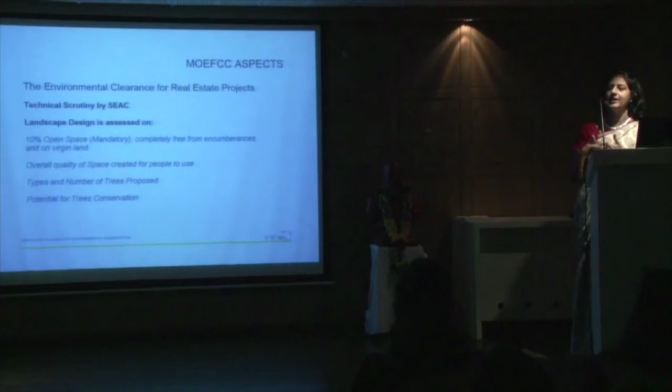As you know, most of these environmental clearance projects in the country happen on a one-on-one hearing. There is a technical scrutiny committee which sits, you present your project in front of them through an accredited consultant like myself, and based on what the technical scrutiny asks you to do, you have to revise your project and go back to them after a deliberative process of about 3 to 4 months minimum. You finally end up getting the clearance.

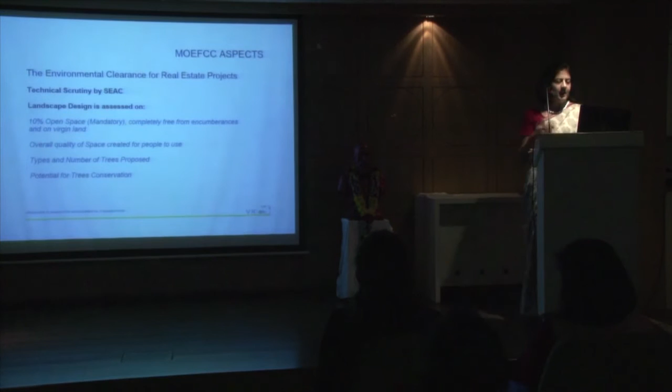They also look a little bit at the number of trees and the types of trees being proposed. So yes, indigenous trees are definitely looked at by one of the members of the committee, and they try to promote indigenous species while trying to restrict invasive species.

If the site already has existing trees, they definitely try to appeal to the developer to retain those trees. Of course, we have to go out to them with a proper ecological report, and through my company we have been insistent to all developers that we get an ecological report done, especially if it is not a very core urban site.

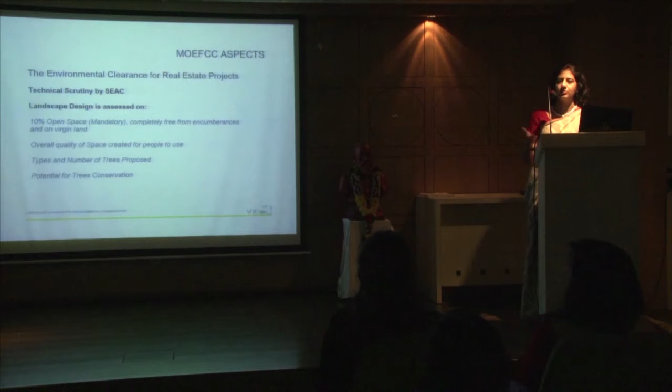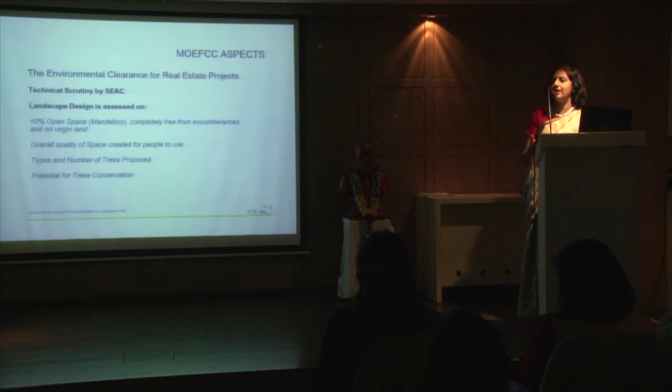If it's a very core urban site, say in Sadashiv Peth, Pune, then having an ecological report done is almost futile because it's almost a brownfield site. But anywhere just outside the city, in semi-urban or rural areas, we ask all developers to undergo an ecological assessment for these projects, which gives us the potential for tree conservation. It gives us an idea as to what actually exists around the site and can possibly guide the landscape.

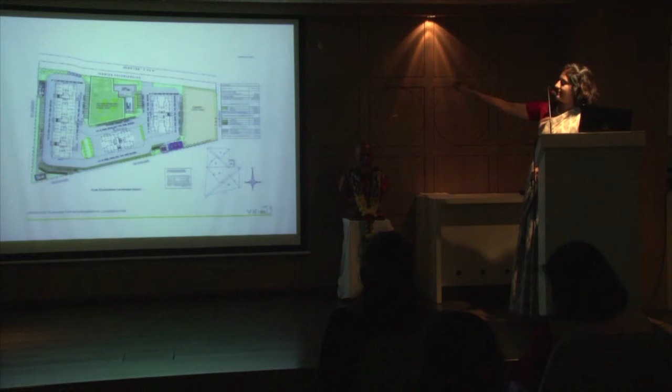So this is how a typical MOEF presentation slide looks like. As you can see, there is a central open space - that mandatory area you'll see with a slightly thicker polygon line. The clubhouse is shown just outside that 10% to show there is no encumbrance on the precious 10%, which unfortunately or fortunately the Supreme Court also has a decree on. So this has to be followed to the T.

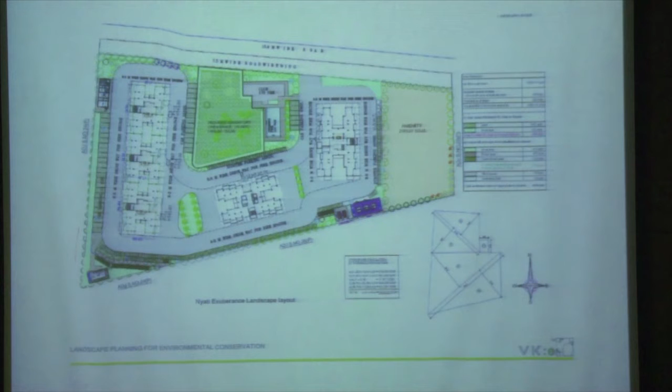Then there is some peripheral landscape which really is small strips of land that just contribute as space for trees, but nothing really in terms of its usage. Again, another site here shows similar landscape areas, and the format for how calculations need to be done is also fixed by this technical scrutiny. So all this needs to be given.

So this is something the committee completely misses out. They are looking at mandatory open spaces, and yes, calculations are all there, but this feature is completely lost. Just before the session, I was speaking about this, about how to bring this sensitivity and subjectivity into the environmental committee of the government.

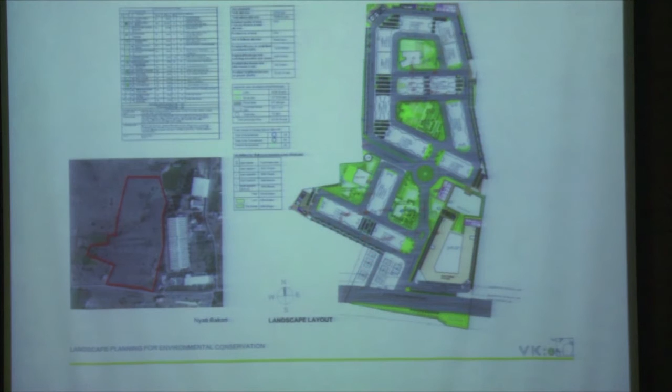That's really the tricky part right now. And like I said, landscape planning is obviously much more than doing landscape design on a 10% open space, right? I mean, all of this audience is going to agree.

As more and more projects are coming outside the city, today I have more than 75 to 80 projects on the fringe of the city where we are going in for environmental clearance. These are along beautiful sites like Manas Lake, or just at the edge of Saswad, where there is a beautiful reserved forest.

For environmental clearance, we are assuming that this site, now under the ownership of the developer, is cut off by a boundary, and whatever comes inside is what I need to think about. Because it's an environmental feature, it goes out, comes in first from somewhere else, and goes out again by the site—unfortunately the larger picture is being completely missed out.

So here are just a few glimpses of how landscape architects can really contribute to this whole process of better environmental scrutiny as well as better environmental planning, even when projects are—for example, I go on a particular site and it's almost heart-wrenching to realize this is going to get completely converted into residential housing blocks. But well, yes, we also need housing, so it is going to happen, but can we not do it in a better way?

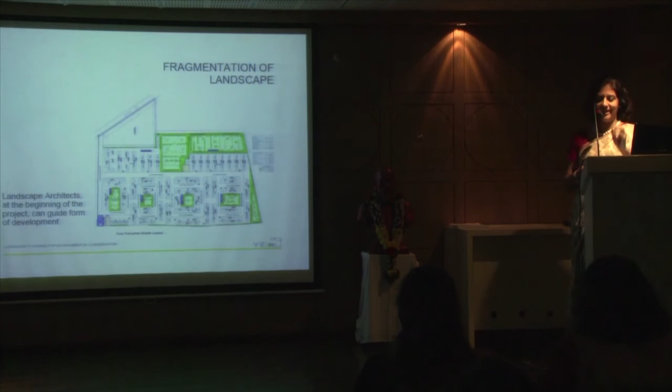I take that privilege of being an accredited consultant, because developers can't go in front of the committee without me. So I sometimes take this extraordinary advantage and put my foot down, saying I will not face the committee if you don't do ecological assessment for this site, and I will not face the committee if there isn't a landscape architect besides me to answer some of these questions. It's almost like an emotional blackmail, but I end up getting my way.

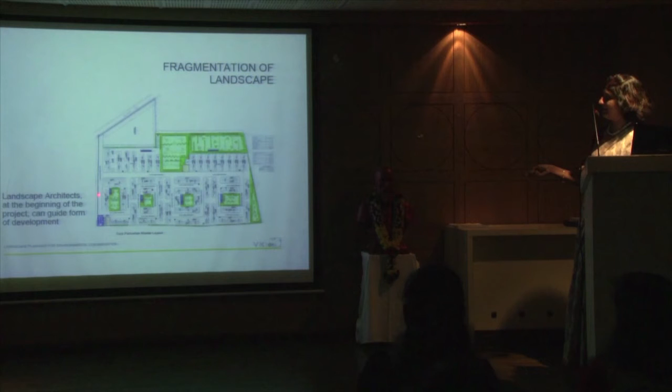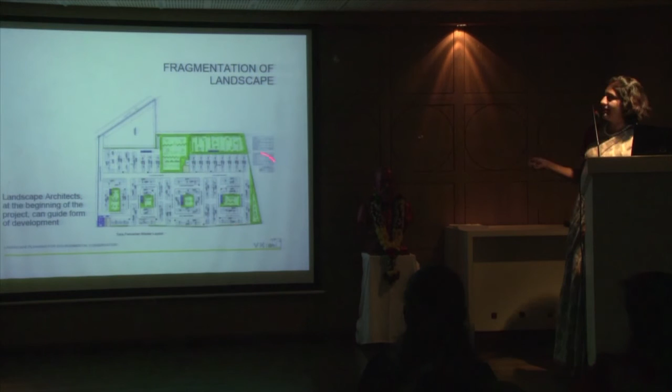Fragmentation of landscape is a very commonly observed design fallacy today, especially in large projects. There is potential to think about a cumulative landscape space, whereas you end up doing designs like this. There is some largish space that has come up here, but this breaking up of landscape spaces into very small parcels just defeats the whole purpose. If it's a small plot of land, it's understandable, but for large projects, if a landscape architect was here, possibly this could have been averted.

Similarly, you'll see here most of the project looks green, but if you actually go into the scale of each of these spaces, they are really very tiny. Once all the buildings come up, the green would be almost lost, because most of these buildings are going to be at least 14 to 18 stories high. So at that scale, these spaces are going to be almost negligible.

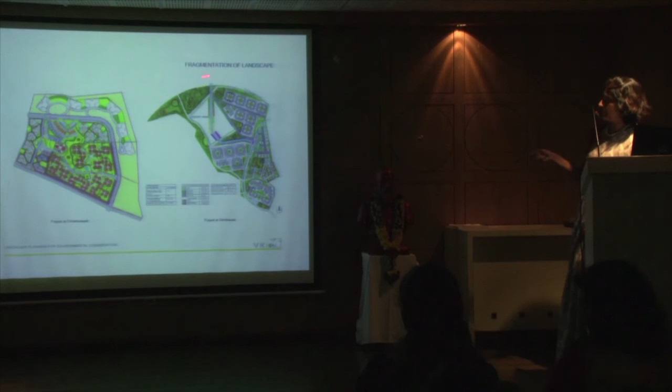Here again, we convinced the developer. This was one of the projects at Jhendewadi, very close to Saswad, a very sensitive site—on this side there's a reserved forest. So we really insisted that without a landscape architect, we will not present to the environmental committee. Here, at least we got a highly contoured part of the site completely kept for landscape, and most of the buildings got shifted to this side. This was not the original plan—you had buildings all over. So we could manage that.

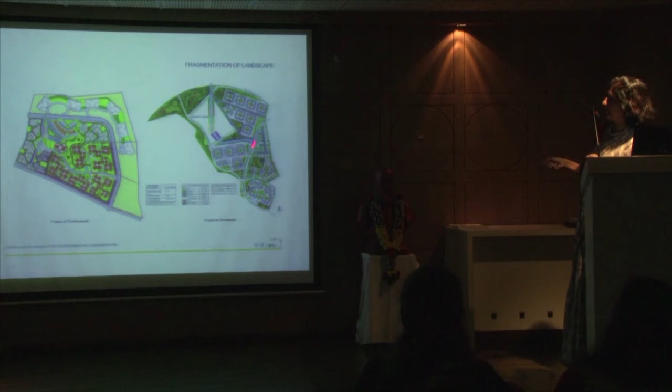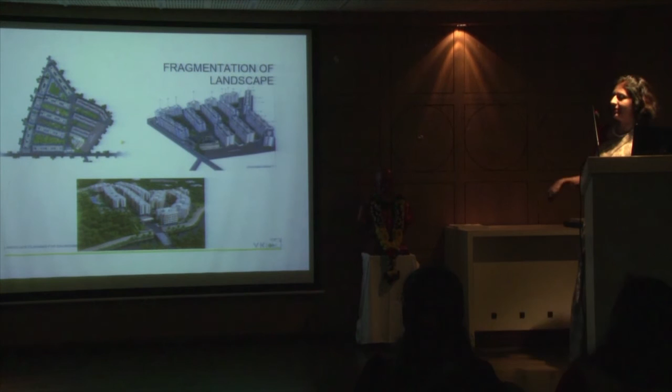I will also share an anecdote about this stream later. So, like I told you before, on the plan this looks okay, but just see how once the height of the building—now this is the actual view—you've almost lost the whole landscape. So on plan it may look like you're giving quite a lot of landscape space, but it ends up being almost negligible.

Planning with contours. In most conceptual plans, even in my fraternity, which is the architectural fraternity, I see very little sensitivity for contours. This is a place where landscape architects can synthesize an understanding of contours much better than architects, because they are not limited by the rules of FSI. The B-arch background is common, but the landscape architect doesn't necessarily talk about FSI, and hence the understanding and synthesizing of contours can become much better through a landscape architect.

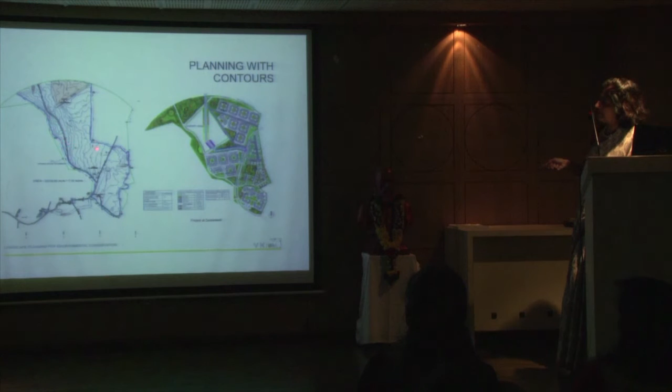As you can see, this was the stream existing on site, and we convinced this particular developer not to touch that stream, but to keep it as we could see it in Nanded City to a certain extent. Of course, in this portion it sort of comes inside and then joins back again, so we had to change things there. But keeping highly contoured areas untouched is something we tried to promote on this project.

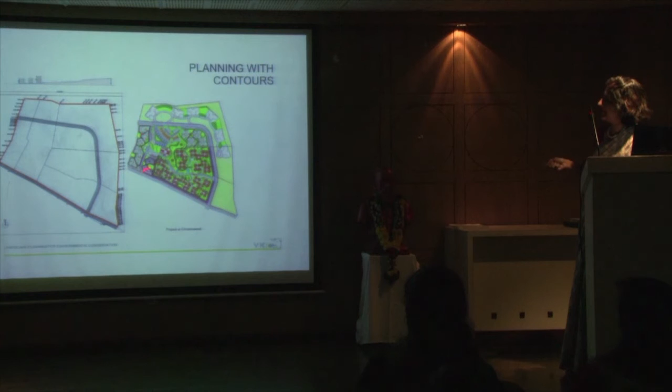Here again, in one project, this was a highly contoured site, and after this there is the hill. So we convinced the client to have a design where high density development is on the lower side, and very low rise, low density is on the contour, so that at least there is some level of retention of the contours. Just quick examples of how contours can be integrated. High contoured areas can be a haven for landscape architects - it's a feature that can enhance the overall project, but it is often lost at the expense of building buildings.

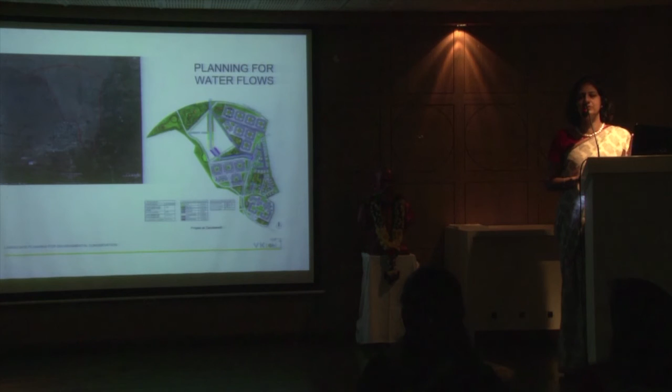Water flows - this is a completely neglected area, because when I actually go and buy the parcel of land, there is no monsoon. I don't understand how the water is going to flow here. The architect makes a plan without understanding that there are minor depressions, contours, and where the water is actually going to run during the monsoons.

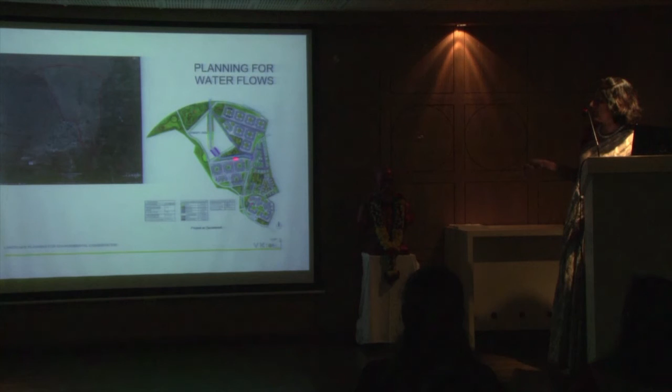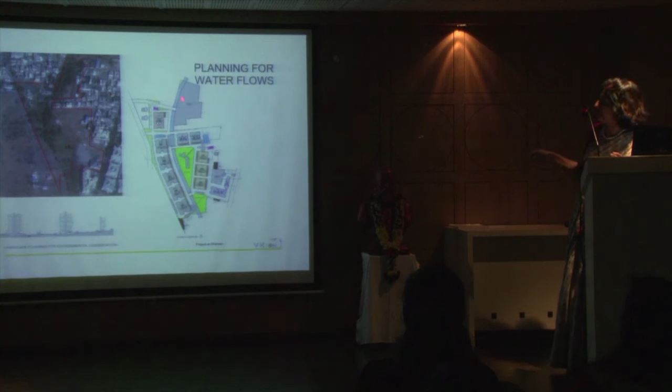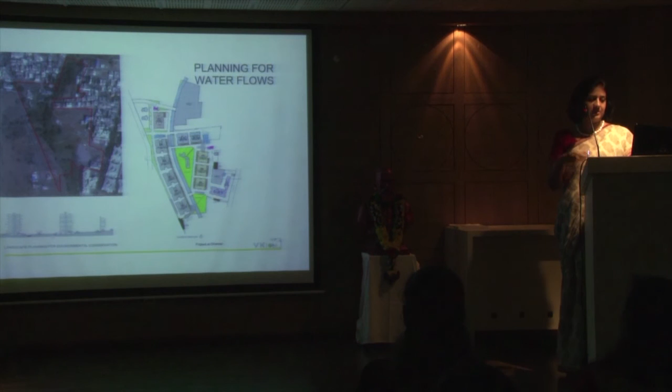Here again you see a classic example of a very nice depression, a nala here, so many water flows crisscrossing, and yet the project really doesn't address that at all. Though we managed to have this stream retained in a particular way on that project. Here again, you will see a beautiful nala. In one of the previous presentations, we saw that this nala is also channelized by the Pune Municipal Corporation. So this is that nala, and all you see is a road next to it. How to really integrate these natural features inside such high density residential development is a challenge, and I think non-involvement of landscape architects is a problem here.

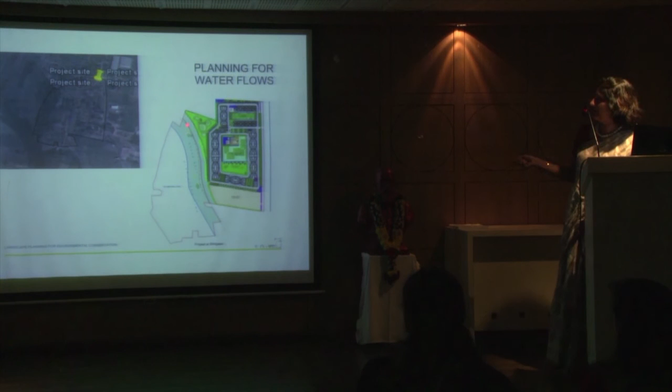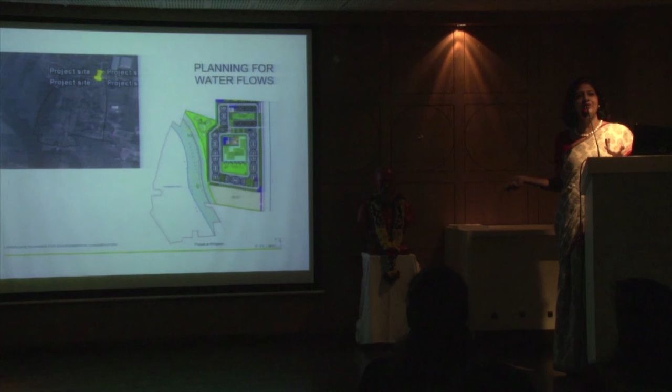Here again, the river. Right next to the river, the mandatory buffer space is left, and then the rest of the building, the plan is such that it has no context to whether it's near the river or not, right? So this kind of a plan could have been anywhere. This insensitivity is very evident, and most of the calculations for such projects happen only based on the FSI.

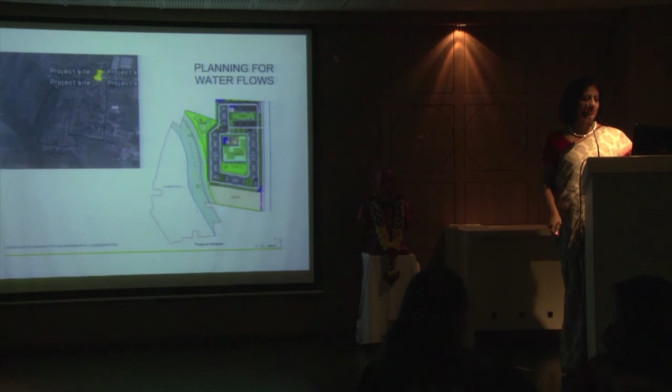Conservation of natural and historical elements on site has been done by architects previously, very difficult to achieve in urban areas. But a resort in Goa, for example, by Dean D'Cruz - he did not touch even a single tree on the site, and actually ended up building a beautiful resort. A building in Hyderabad where the natural element of stone was kept intact, and a banyan tree around which the building was built. So such projects, examples are there.

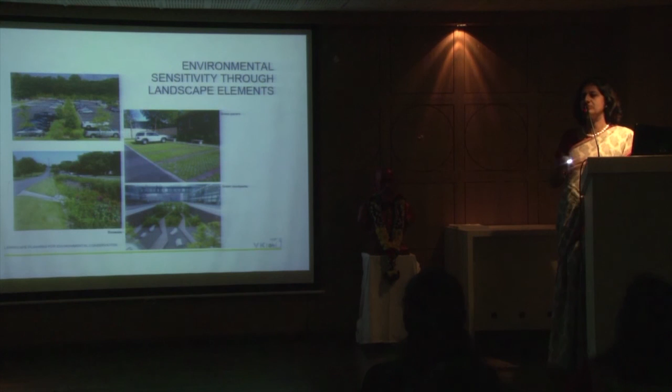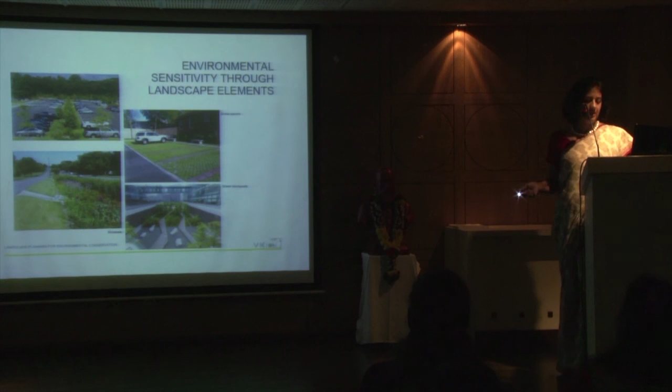Environmental sensitivity through landscape elements. Bioswales, for example, we have been promoting a lot, because you need not always channelize something to carry your water flows - you need not put them below the ground. Grass pavers also something we are promoting. Spaces between buildings or courtyard spaces, how they can be better treated is something we work on. Corridors, podium and terrace gardens.